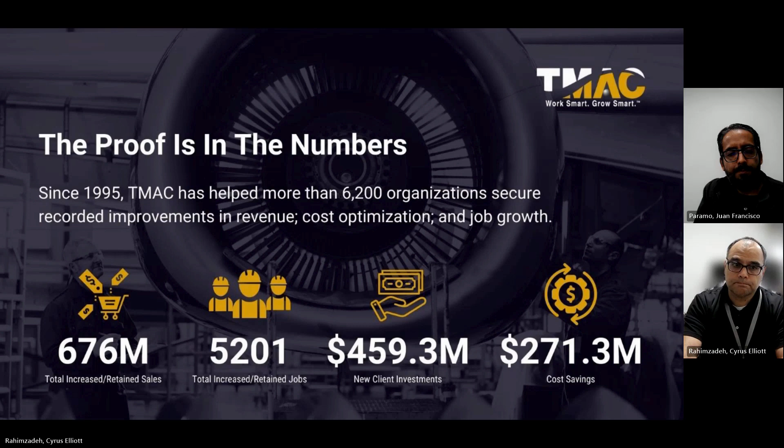So, who is presenting? My name is Cyrus Rahimzadeh. I've been with TMAC about 5 years. I'm a mechanical engineer and systems engineer by training, and I've been doing engineering work in the product development space for about 20 years now.

My name is Juan Paramo. I've been with TMAC for 16 years. My background is computer engineering, so I have done a little bit of everything, going from microcontrollers, PLC, robotics, vision systems, and the latest we're getting into is robotic process automation.

So what's the purpose of today's presentation? The purpose is to share the lessons learned by the TMAC technology team, which is myself and Juan. And what we're going to do is share our general approach and show some case studies related to how data can be used to make decisions.

So what do we mean? We know that companies are required to constantly make decisions, and these decisions can be around the domains of profits, products, processes, technology, and people.

Now, how do companies typically make these decisions? They can be tempted to make these decisions based on expert judgment. Maybe they've been in the business for a while and they just have a gut feel. There can be hearsay, maybe they go to a trade show and someone says this is the latest whiz-bang solution that should be used. There's a lot of sales literature out there, which can be good or maybe not so good. Sometimes it's just out of exasperation, they just want some sort of a solution. And then many times we find that clients are hoping for the best.

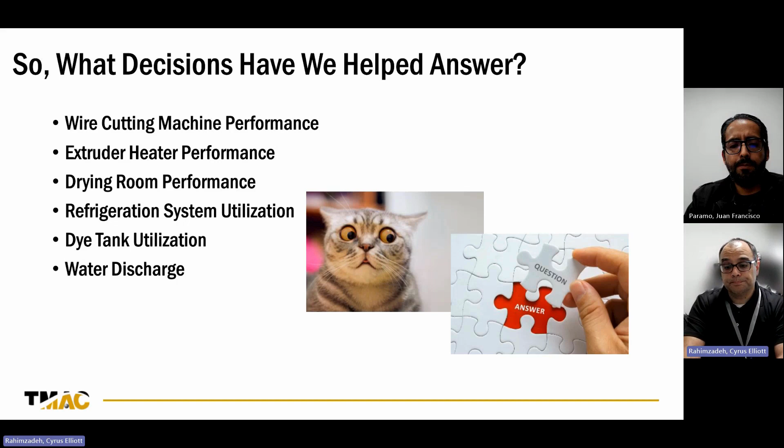So we've worked in multiple domains looking at different types of equipment and different types of processes. The first case study we'd like to walk through is wire cutting machine performance.

And the question the owner had was, should they invest in a new piece of equipment? Well, the real question we thought was, what is the utilization of this current piece of equipment?

So what we did is develop a monitoring architecture. This particular system we developed around a WERMA system, utilizing an operator-actuated downtime and setup button. This was a manual button that the operator would press depending on the scenario.

We used a distance-based laser sensor to detect a part inside the machine that rotated with the frequency of each part being produced, so we could use that to count parts. We also had a current switch, which we used to calculate when the system was on or not on, in order to determine availability.

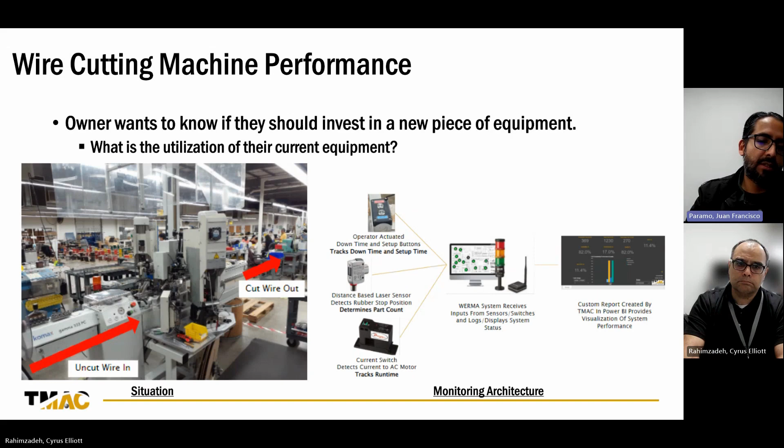So what was the utilization of the current equipment? After monitoring the system for several weeks, we found that the data shows the OEE was about 19%. So the owner can use this information to focus on changing their workflow of operations to improve the availability and performance. So in this situation, maybe the best answer wasn't, let's get another wire cutting machine. The better answer would be, let's look at the process and get more utilization out of our existing assets.

Just another quick detail: Power BI only allows you a limited number of data refreshes, and it also depends on the licensing that you have, so Pro versus Premium. You can determine or specify different times during the day to make the data refresh.

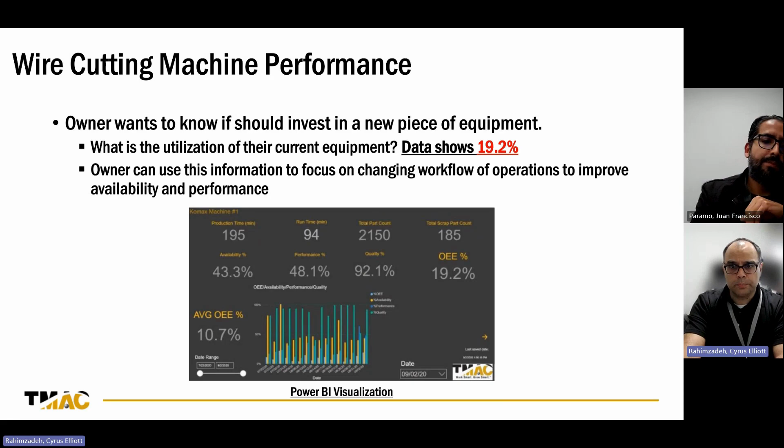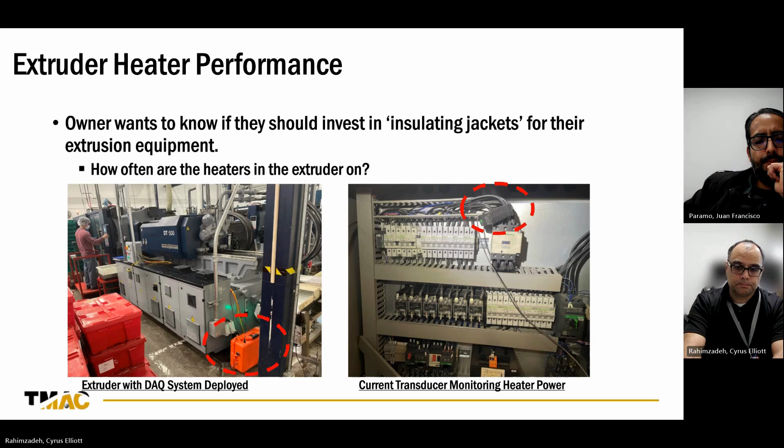So a question was, how often are the heaters on in the extruder, and how much power is really being consumed? After monitoring the system for several weeks, the actual answer was that the data shows the heaters are rarely on. So in this case, there wasn't a business case to purchase the insulating jackets.

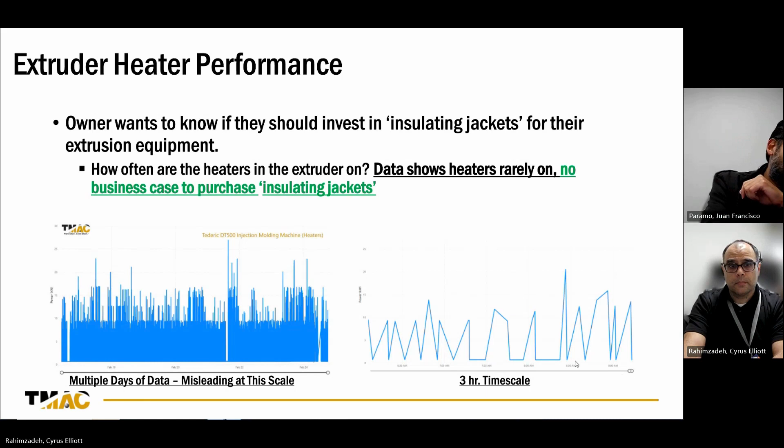So this next case revolves around drying room performance. In this situation, the owner has many rooms that are heated, and inside these heated rooms they have their product, which has to cure or dry for some amount of time. The question was, should they adjust their drying process? We tried to answer how long the product should stay in the drying rooms. Prior to us running this test, the process was to leave the product in for 24 hours, let's say, which is more tribal knowledge than an actual calculated time.

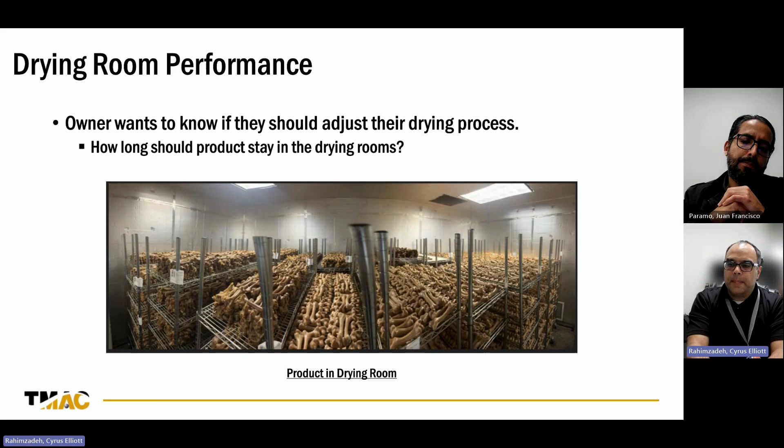Just a quick comment on this: this was an off-the-shelf system. I know you're going to present this in a future slide, but this was enough, and very robust and reliable. So if an off-the-shelf system is enough, that will be the first choice, rather than a custom system.

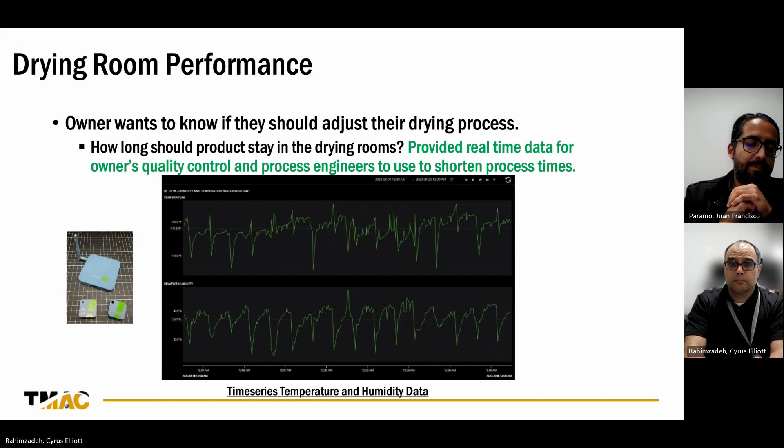The question we tried to answer was, is the refrigeration system on when it should be? You can imagine this refrigeration system takes time to get to the correct temperature, and likewise, especially in the Texas heat, it consumes a lot of power to get down to the operating temperature.

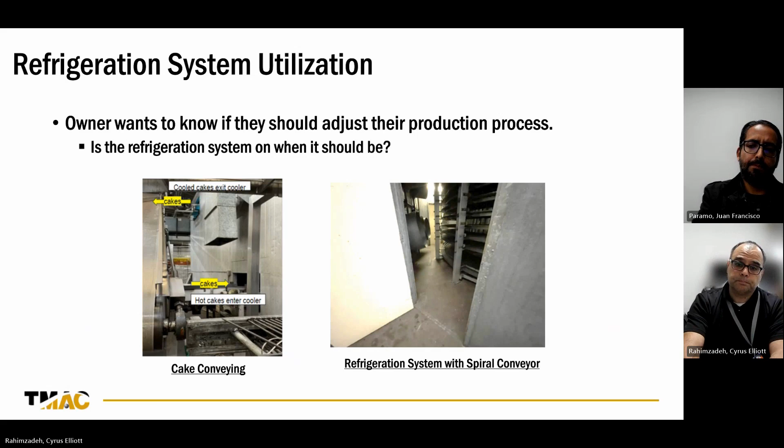To better answer this question, we came up with a system where several things were measured. On the left, a laser-based distance sensor deployed on the inlet conveyor to the refrigeration system. The cakes break this beam, so the system knows cakes are entering. On the outside of the unit, we had this orange box with a current sensor to detect if the refrigeration system is on or not. We also had thermocouples inside the refrigeration system to detect if it's at the right temperature. So this lets us know if product is in the system, if the refrigeration system is on, and if it's at the right temperature.

Just to add to that, for the digital input we got clever and found a hardware component to make this happen: a timer relay. So basically, if we see a cake, the signal stays on until we see the next cake. That allowed us in the database to keep track of the total time that cakes are entering the system.

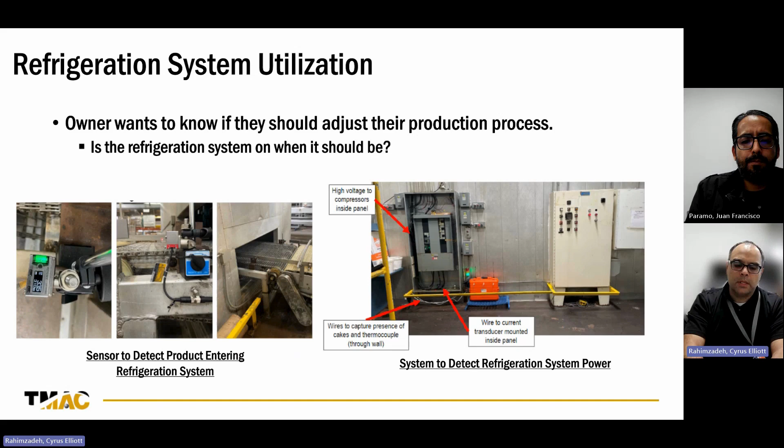You can imagine these cakes as they're coming into the system. As the cakes are making and breaking this beam, that's an intermittent input, but the frequency of the data acquisition system reporting to the cloud service isn't necessarily the same. So between this sensor and inside this box was a timer relay. We were able to, when a cake passed it, keep that signal high for 5 minutes in this case, so we were assured we were reporting to the cloud service accurately.

And I believe this was the first test as well of the Swift system that you will explain. Yes, yes.

So what were we able to answer with the question? Is the refrigeration system on when it should be? We identified opportunities to streamline the production to utilize the refrigeration system capacity. So what does that mean?

Basically, this is a Power BI visualization of the data. In the bottom right you'll see a bar chart. The lighter blue color is when the system was available, meaning the refrigeration system was on and at the correct temperature, whereas the shorter dark blue bar indicates cakes were actually passing through. The disparity between the light blue and dark blue is availability the client is paying for but isn't using, because the system is at temperature and on, but no cakes are entering. So the client can use this information to either use the refrigeration system less or change their process upstream for more consistent flow through the refrigeration system.

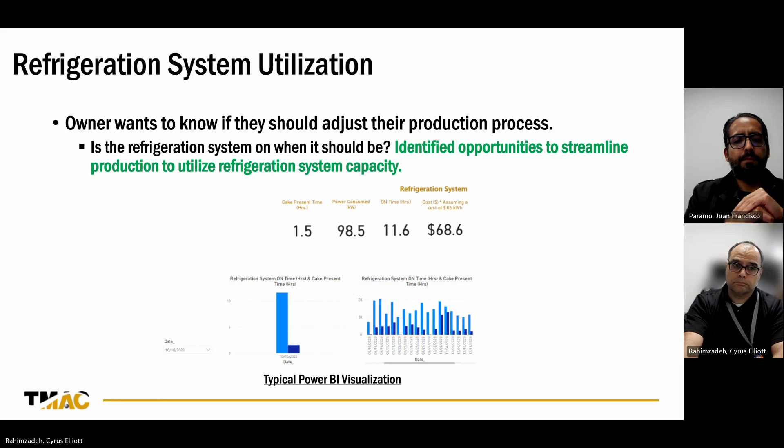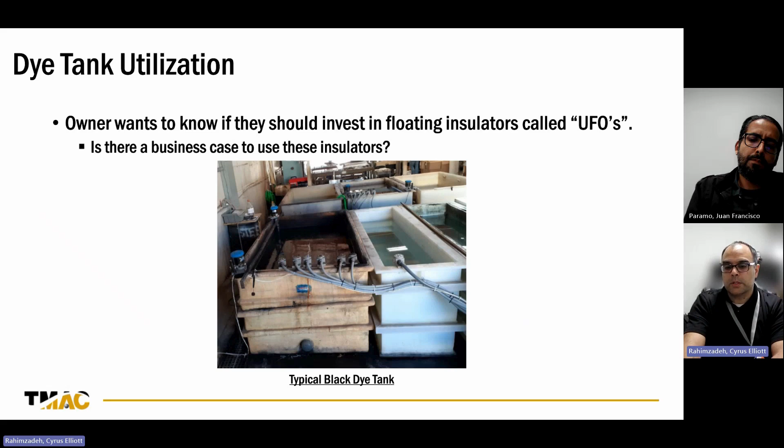So the answer was, with the UFO insulators installed, the availability of the tank increased from 24% to 55%. What does that mean? Basically, with the insulators floating on the surface capturing that heat, the time to get up to temperature where the black dye tank process was effective decreased, and the time the system stayed at that operating temperature increased. So he had more availability of the tank, and could run product through it. He can take this information and make the business decision of whether to deploy UFOs on this tank or others, and when that makes sense for him.

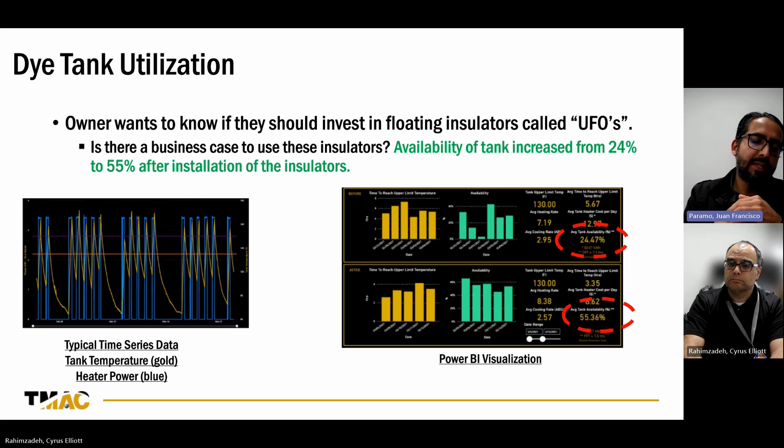Additionally, we also did some edge computing. Basically, based on the temperature range, we're able to do some computing at the edge, meaning at the gateway, and trigger some lights. You can see we have the green, the yellow, and the red. That really helped their process because part of their internal process was to have one of his associates walk around and periodically manually verify the temperature. So having a system like this helped monitor the system, and we could also affect that light at the edge depending on the temperature, helping his associates verify the system was at the right temperature.

Just to give you some examples of edge computing, you can also average data before you send it to the cloud. You can take the max or the min, so you can do some useful processing before sending the data to the cloud.

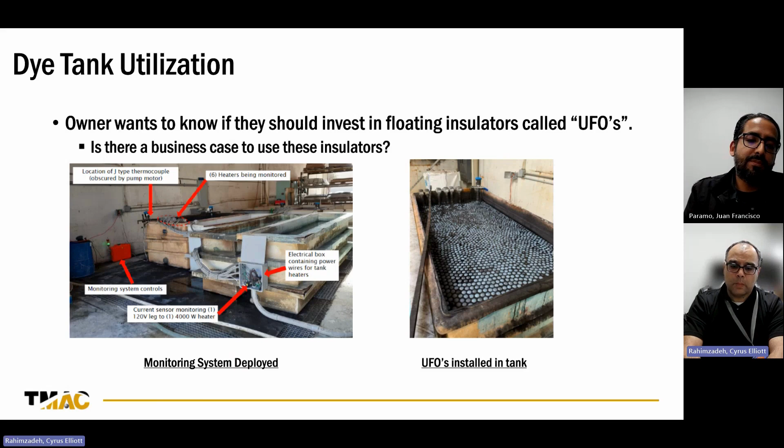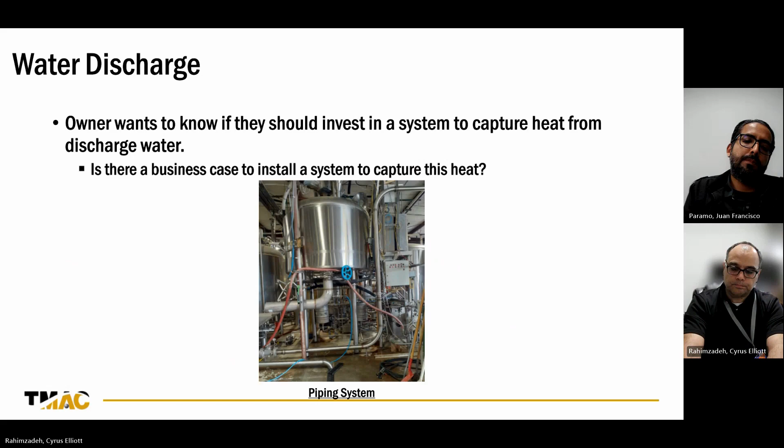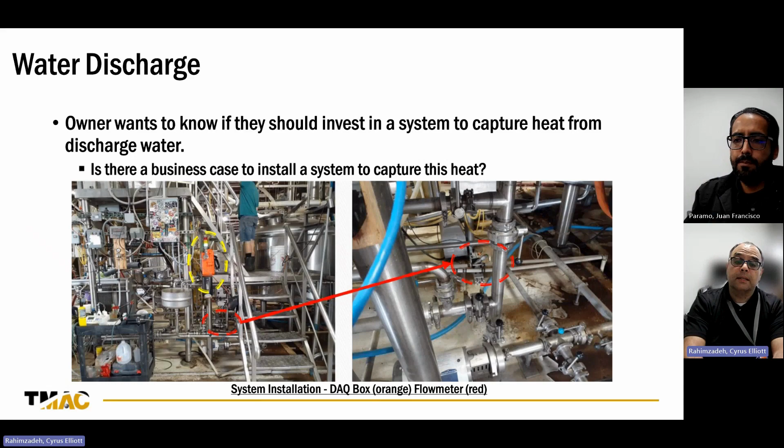What we did is we deployed a data acquisition system in their facility, and then used a flow meter, you can see here, that was in line with their discharge. Their process would run for several days, we left the system there for a week. We monitored how much water was being discharged, and then could capture that information to provide data for the owner to make an evidence-based decision.

So what did we find? We knew how much water was being discharged for the time we were there, and could develop an annual forecast. So in this particular situation, we could say, this is how much water you consumed for a week, and if this doesn't change, you're going to consume this amount in a year. We knew the incoming and discharge temperatures, and the amount of natural gas it takes to heat that amount of water to the discharge temperature. We could take all that information and turn it into dollars so the owner could make a decision.

Just to point out, in this case we used Google Looker visualization, which is an alternative to Power BI. There are different alternatives such as Grafana, Tableau, and one that just came to my radar is Azure Synapse. That's basically to analyze huge databases, data lakes, and data warehouses, so it's more efficient for big data.

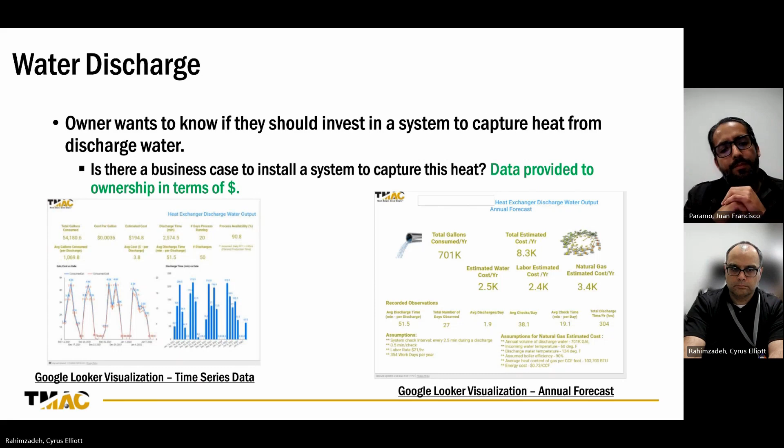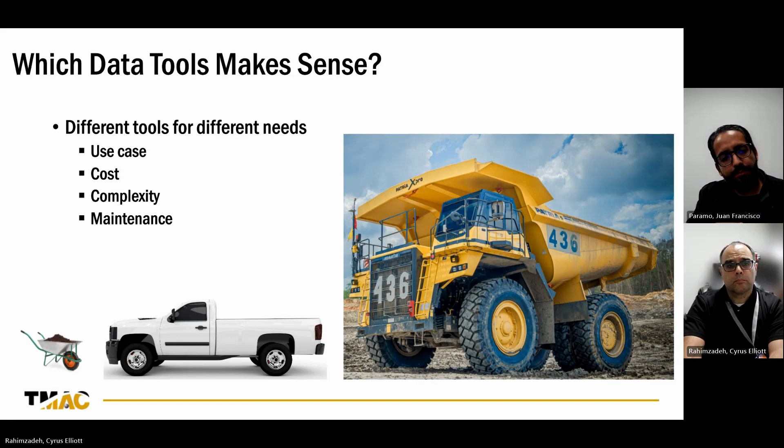So what is our approach? We've basically broken it up into 3 types, again based on the use case, cost, complexity, and maintenance.

However, it doesn't have a lot of flexibility, and it's limited to temperature, pressure, meaning barometric pressure, and humidity.

In the middle of the road, so this is more of the pickup situation, there's a sensor system we started using called Swift Sensors that we've integrated into some cases.

One of the benefits of this is that it makes very attractive dashboards that can be visualized on a cell phone or a PC.

It's a more open system where we can have anything with a 4 to 20 milliamp output, or let's say a 0 to 10 volts DC output. We can handle those inputs into the Swift Sensor system and visualize or track them as needed.